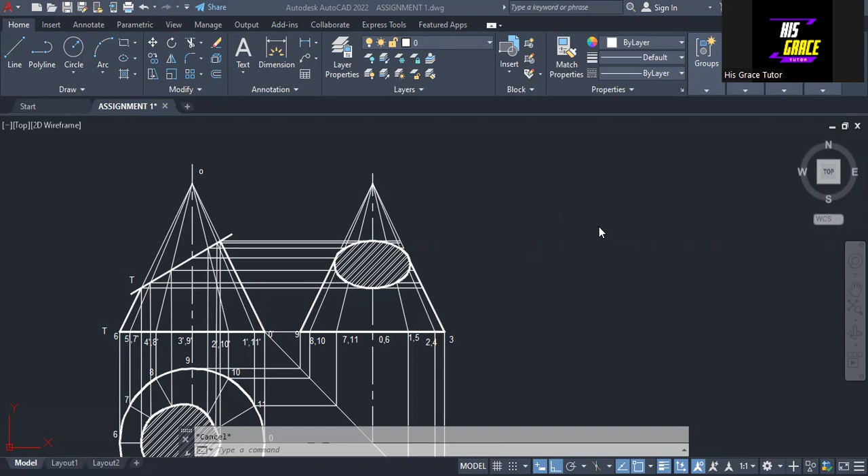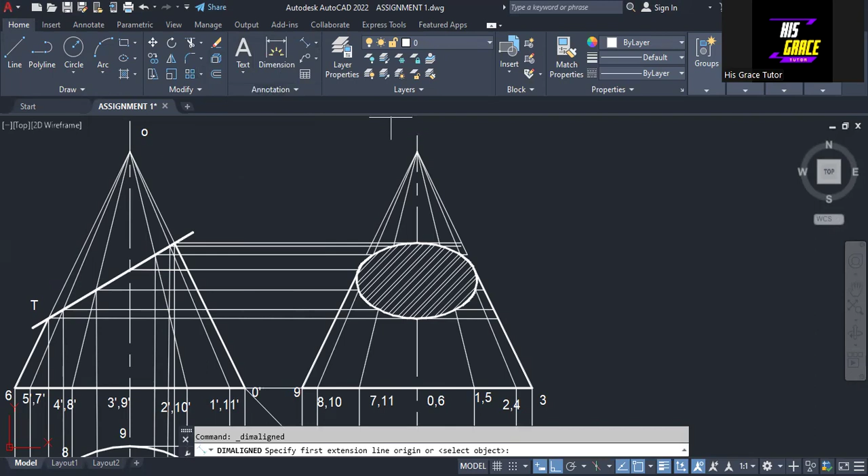The first thing we have to do is know the true length of the cone, that is the distance from point O to this point here. To do that, we click on dimension, then select this point and also select this point, and we work with aligned. So we click at this point and then this point to find the true length, and this gives us...

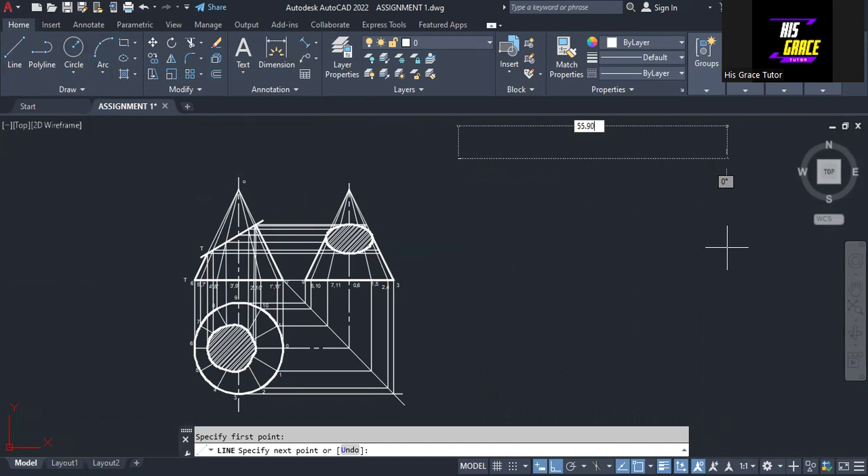55.9017. So we click on line, click on this point, make sure ortho mode is on, and enter 55.9017, then enter. So that's the length of the line, which is the true length. Then I'm going to put off the ortho mode.

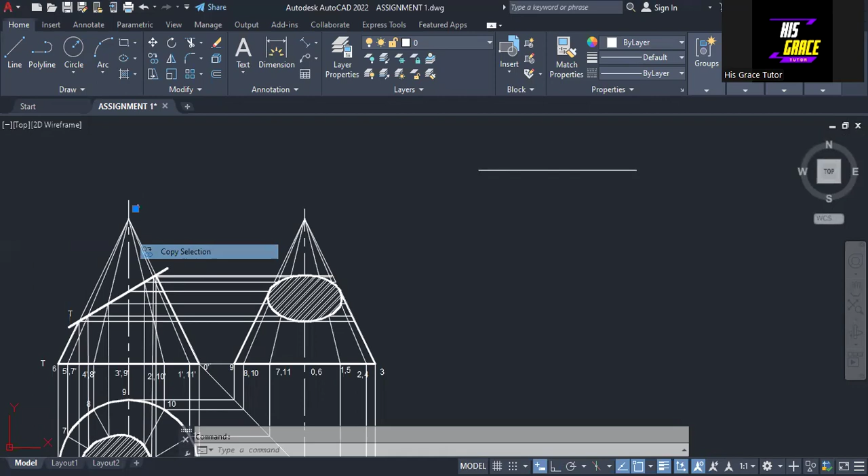Then I want to label that point as point O. So I'm going to copy the selection and drop it here. All right, so that is point O as we have it.

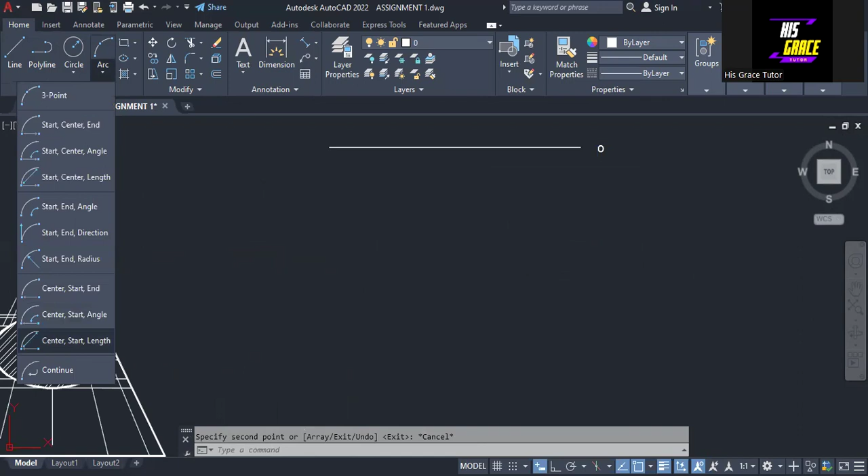The next thing we are going to do is draw an arc. So we come to arc here and select this particular arc. Then we click at this point, that is the center, and then we click at this point. The arc goes in this direction, okay? So we have the arc in this direction, so we drop it here.

The next thing we are going to do is know the approximate length of the arc from 0 to 1, or 1 to 2, whichever we like. So we need to know that distance. What I'm going to do is click on dimension, then select this point 0 and select this point 1 here, and then we have this point.

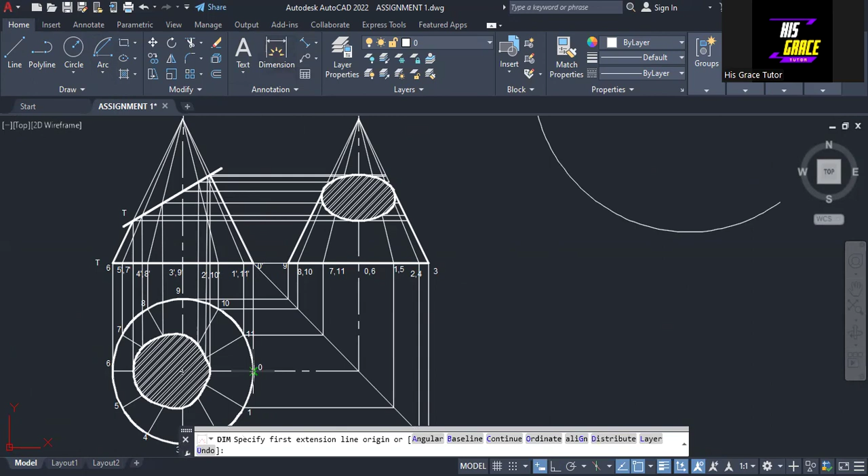So I'm going to click on this linear dimension, select this point 0 and select this point 1. So we have it to be 12.5, that is the approximate length of the arc.

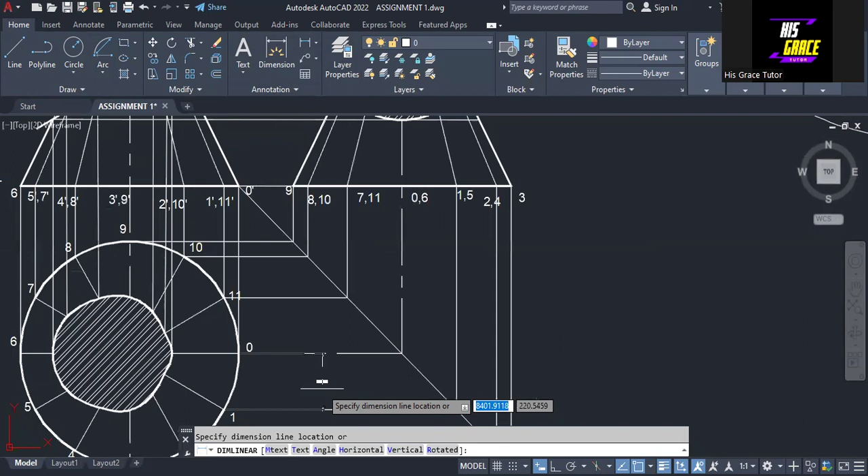So what we are to do now is take the arc here. We come to this point and select this arc. Starting from this point, we are going to make 12 arcs, giving it a distance of 12.5. Press enter. So we have the first point here.

Then we come back here and select again, taking this point as a center. We give it a distance of 12.5, enter, so we have the second point. Then the next one, we select this arc, and this is the center. We give it a distance of 12.5, enter, so we have this point now.

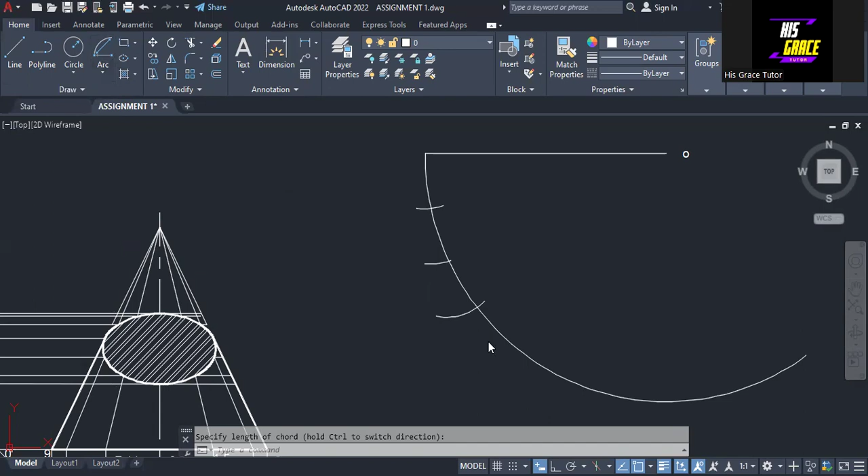Next, we click on the arc again, take this point as a center, and give it a distance of 12.5, enter, so we have this point. I'm going to pause the video and do the rest. We are going to 12 points; we need to control the time, so I will pause the video and do the rest.

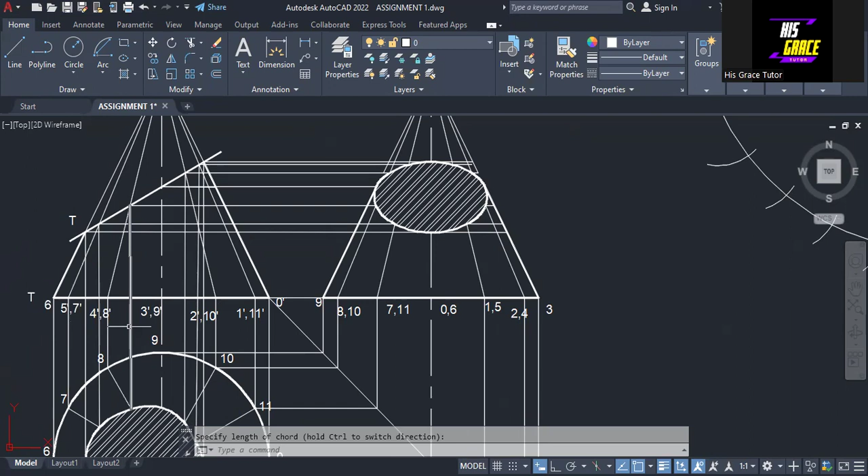So we have all the arcs here. The next thing we are going to do is number each of these points. Let's look at what we have here. When we number, we are opening from this point 6. We have 5, 7 follows this, 4, 8 follows, and we have 3, 9, 2, 10, 1, 11, and 0. So we are going to number these points according to what we have.

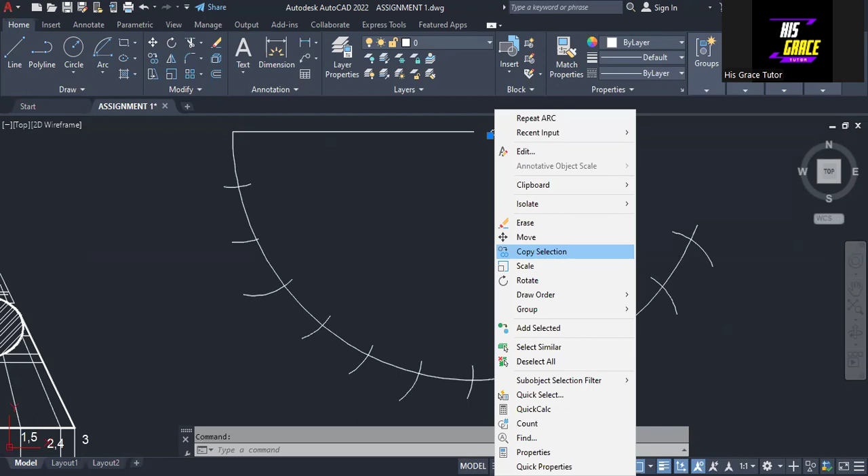So what I'm going to do is copy this letter and put it at this point. We have 1 at this point, and then 1 here, okay, so we have 1 here, and another 1 here. Okay, so we have 1 here, so there is 1 at this point, and we drop 1 here. Okay, also we have 1 dropped here and 1 dropped here, and then we have 1 here, okay, so 1 here, and then the last one is here.

Okay, so we are going to edit each of these now, that is what we are going to do next. So I will take this to this point, so we have it here, and also this one, I'm going to take it and drop it at this point. All right, so I'm going to edit each of them, starting from this, so this point is point 6. Okay, so I'm going to edit it. So what's happening? All right, so I will.

Okay, so there are so many points. So this is point 6. So here is point 5, and then this point will be point 4.

So this is point 4. So this point here is point 3. So this is 3, and then this point here will be point 2. So this point is 1.

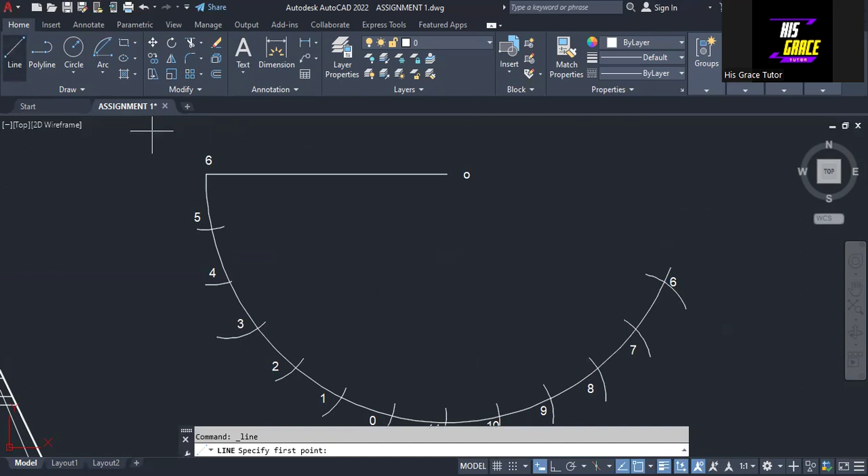All right, so we have it. So the next thing that we are going to do is click on line, and then we are connecting this point together with point 0, or point O. So we repeat the line, joining this point together with point O, and then we repeat the line again.

So this point to point O, and then we repeat it, joining this point together with point O. I'm going to pause the video and do it. Then when I'm done, I will come back.

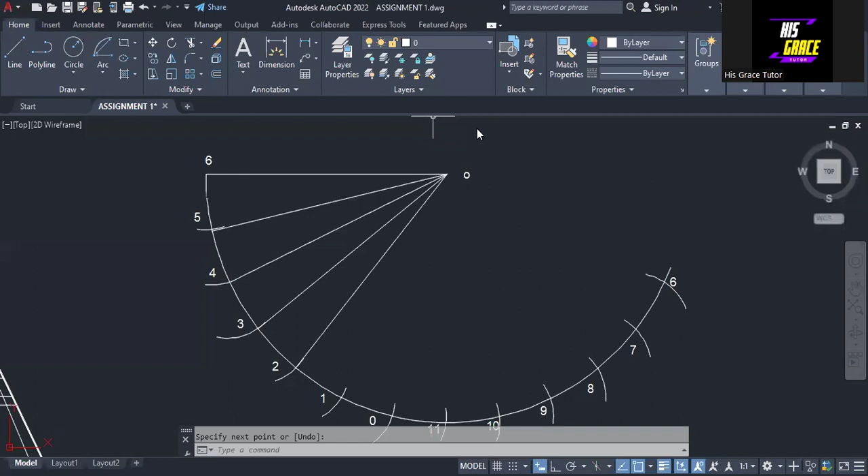All right, so the next thing that we have to do now, as we have drawn all the lines and joined them with the apex of the cone, is to know the distances from this point O, so point O to this point on 6, and that of 5 and 7, and that of 4 and 8, and so on. So what we are to do now is click on aligned dimension.

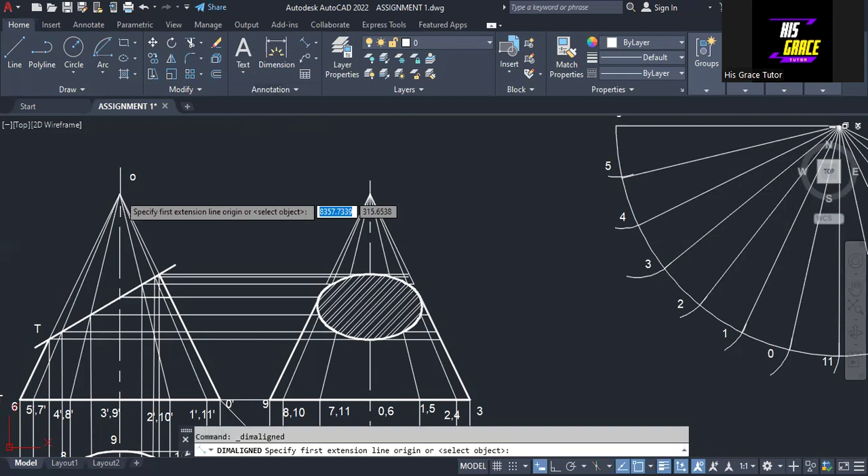So click from this point and also select this point, and let's know the distance. It is 39.3703. So that's what we have there, 39.3703.

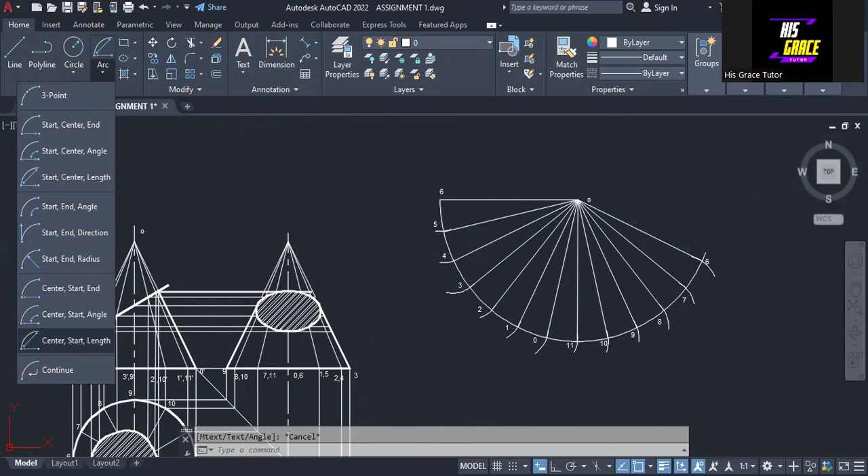So what we are going to do now is click on arc, and we select this particular arc. So we take this point at the center, and we give it a distance of 39.3703. Press enter key. So we draw an arc from here, going in this direction. I'm going to lengthen it, so I'll select it, click on lengthen, and it goes like this. Okay, so that's it.

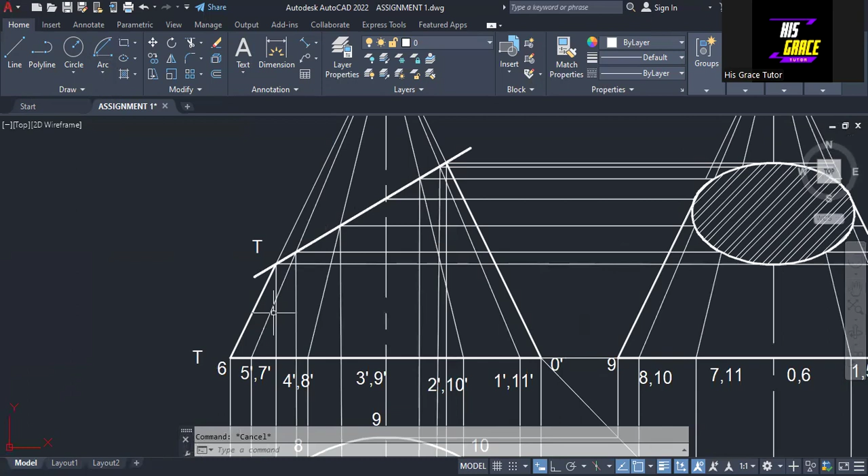So deselect it. So the next one that we have now is that of 5 and 7. For that of 5 and 7, we are going to come back here and select this dimension, and then from here to here, so we have it to be 36.4358.

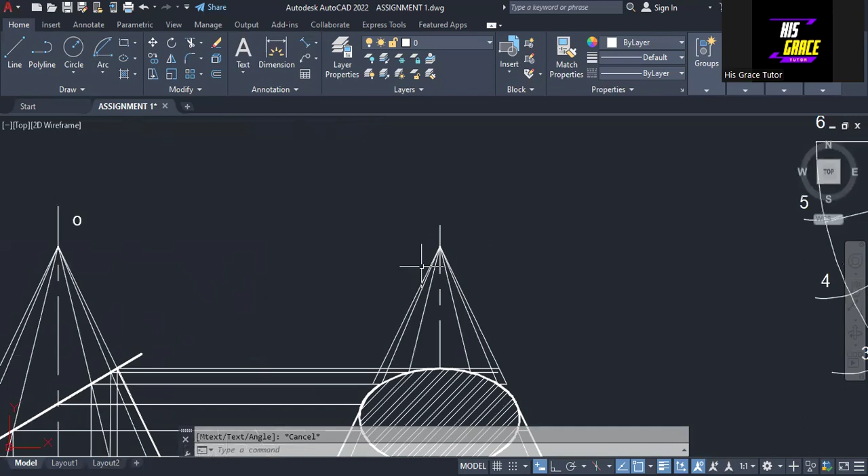So we escape it and come back here. We select the same arc here, and then we select this point as a center, and give it a distance of 36.4358. Press enter key, and it goes in this direction. Okay, so we have it like this.

So just click, and then you can lengthen it. So I'll click on this, and then we lengthen it so it goes in this direction. Okay, so we have it like this. All right, so just drop it, click and drop it.

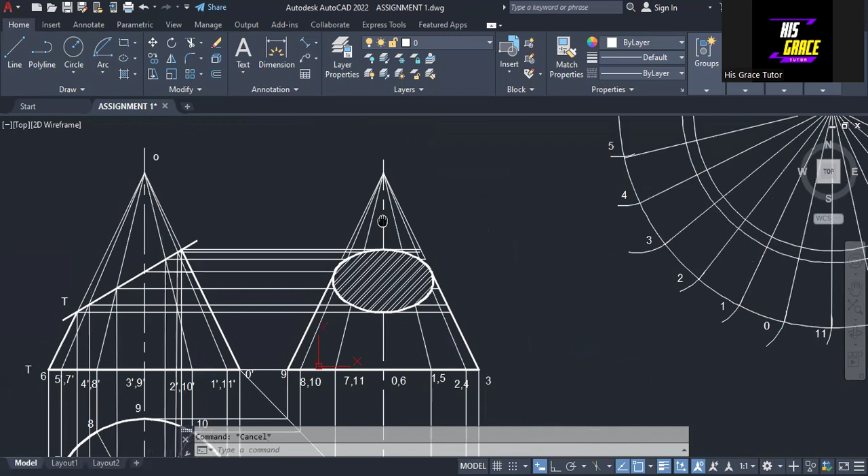So select this. All right, so the next one that we are going to do is that of 4 and 8. So we click on aligned dimension, and select this point over here, and this point on the cutting plane that is meant for 4 and 8. So we have this to be 30.2089. So that's what we have there.

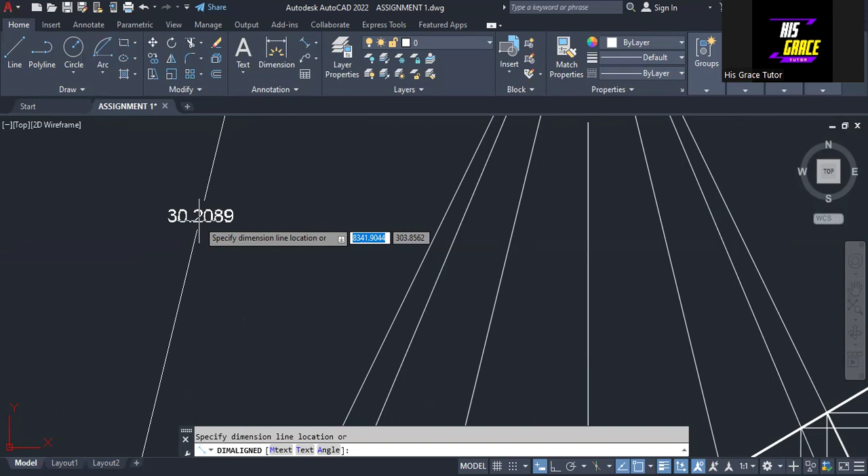So the next thing is we just press escape key and come back here. We select the arc, this particular arc, select this point at the center, and give it a distance of 30.2089. Enter. So we draw an arc like this. Let's drop it here. Click on this, and then lengthen it so we have it here. All right, so that's it.

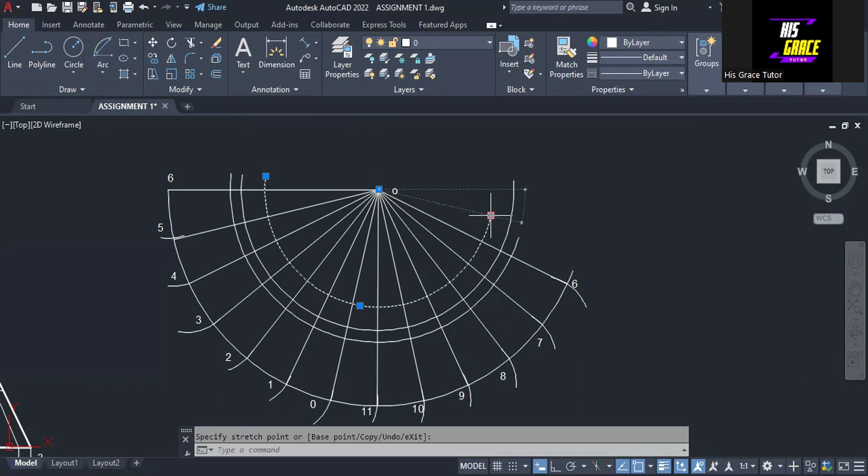So press escape key. I'm going to pause the video and do the rest, then I will come back and show you the next thing that we are going to do.

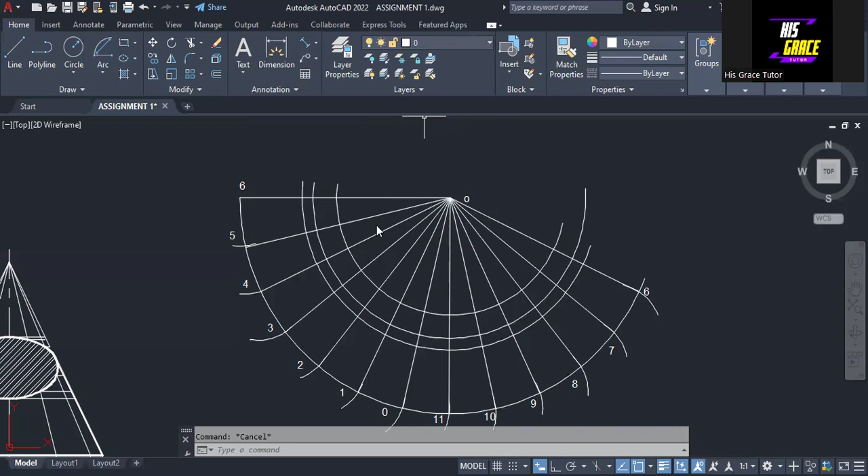And here we have drawn all the arcs as I said. The next thing we are going to do is join the points together. So we go to draw and select spline fit.

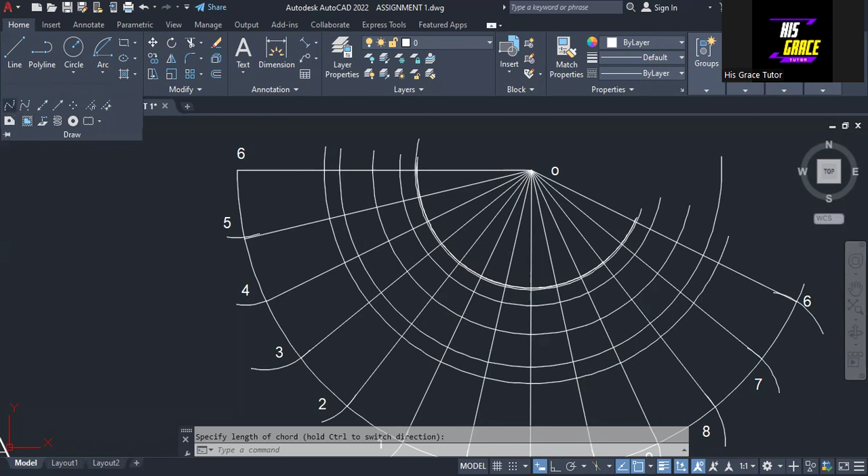Starting from point 6, we move to point 5, then we move to point 4, then point 3. So this is point 3. Then we move to point 2, so this is point 2 here.

Then we have to move to point 1, so this is point 1. Then from here, we move to point 0. Let me see, this is point 0 here, this point.

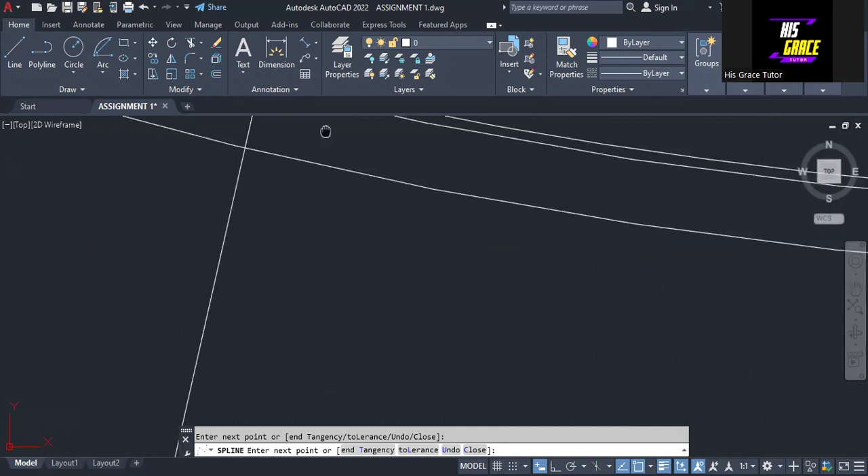Then from here, we come back to point 11. So this is point 11 here. Then from 11, we move to point 10. Point 10 is here, and then from here we move to point 9. Okay, that's point 9, as you can see.

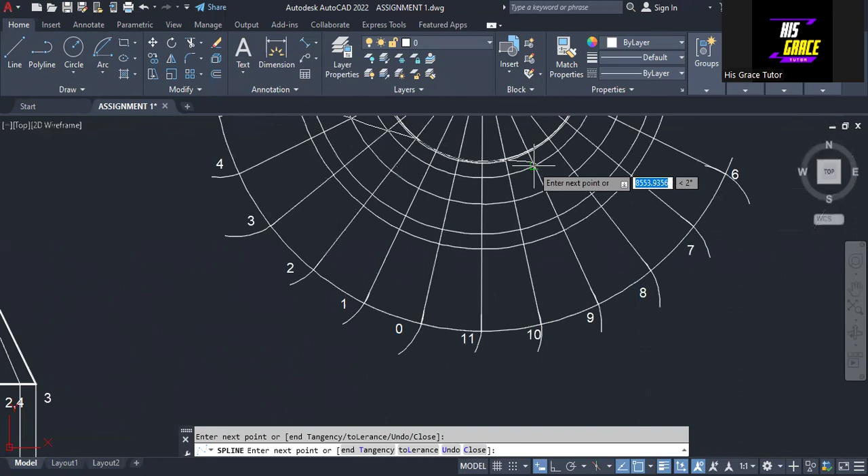So then from point 9, we move to point 8, then we move to point 7, then we move to point 6 here. Okay, so this is what we have.

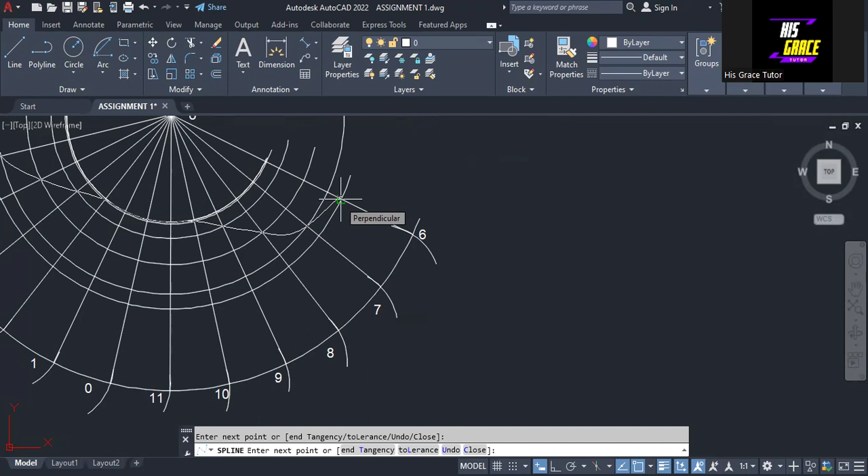So the next thing we're going to do is press key C on the keyboard and press enter. I'm going to trim off what we don't need. So we click on trim and select what we do not need.

I don't need this one. I need to make sure I trim everything off. So I can trim this off, trim this off. I can also trim this off, this and this. We trim this off and also trim this off.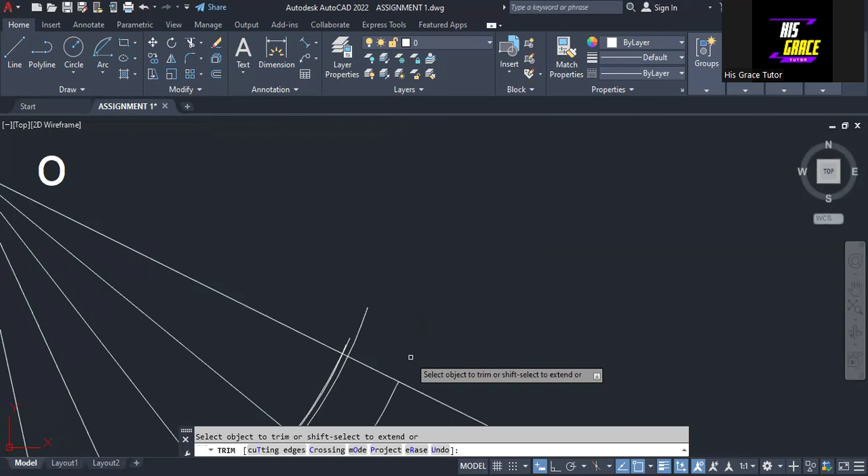Coming here also, I can trim all this off. So we have that, and the excess of the curve that we have here, I can trim it off. So I'm bringing this through. Let me trim them off together. So we have it here.

So the next thing we are going to do is break this line, because we need to make some lines thick. So we select this, I will break this off. Also I'm going to break this off. So I will still join them. Right click, then enter.

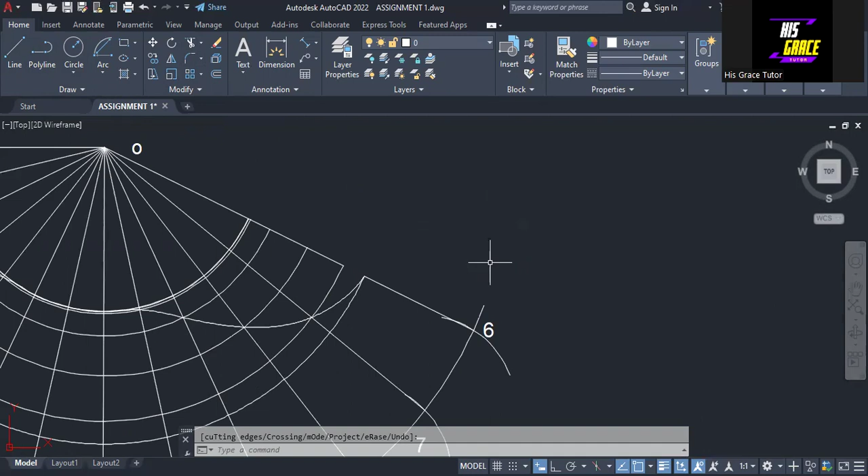Also I need to break this line, I need to break this off. Even the arc, so I can break off this arc. As we have here, I can break this off, I can break this off.

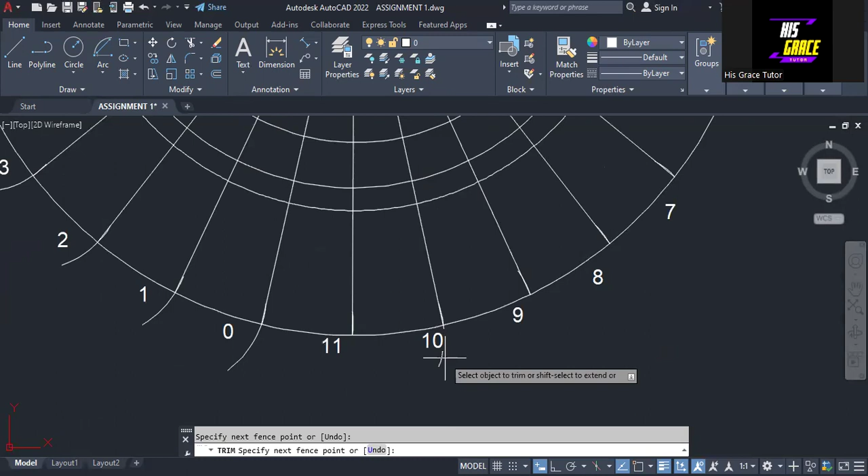If it is manual drawing, I don't have to clean all this, but I want my work to be neat. So I trim this off, and then we trim this off, this off, this off. And then we trim this off and also this, then also we trim this off. So we have all this.

So the next thing I'm going to do is take this one that I broke and reproduce it. I will do the same thing for this. From here to here, so we have this.

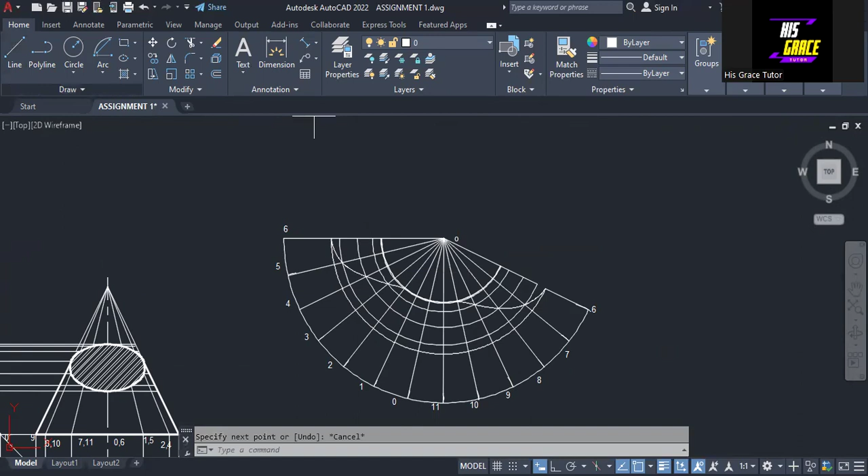So then the next thing I'm going to do is, I will do it again. Click at this point and to this point here. So we have this.

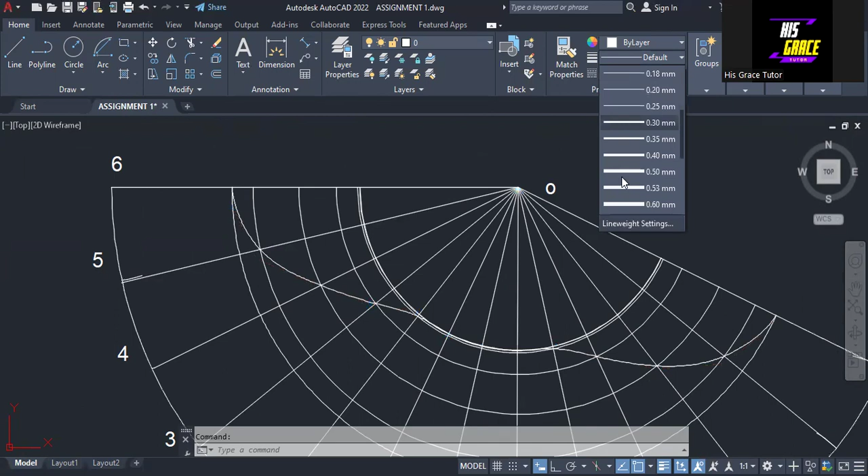So then I'm going to select this line, I will select this arc here, then I will select this line. So I'm going to make them thick, that's what I want to do. Coming here, I will select this particular one. Okay, let me select this. So then press escape key.

So this is the surface development, and this is how it looks, as simple as I've done it here. All you have to do is practice. Thank you, keep on practicing, and God bless you.